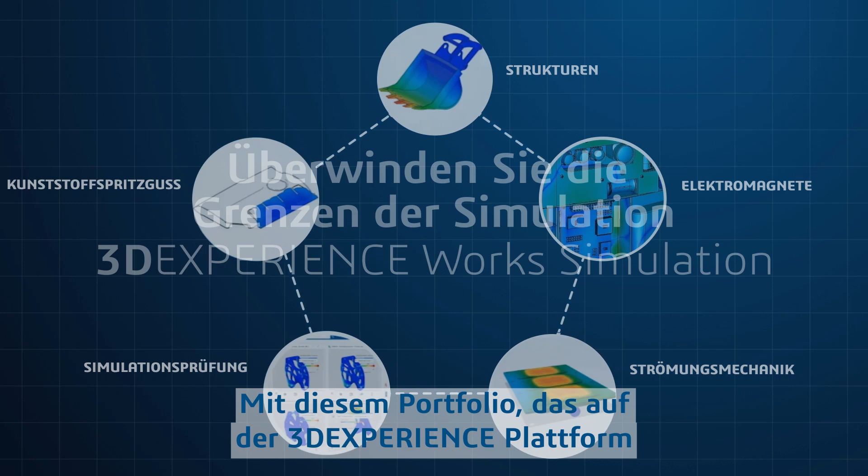The 3DEXPERIENCE Works simulation portfolio provides comprehensive all-physics, all-scale simulation solutions for evaluating how your product will behave in real life. With this portfolio, available on the 3DEXPERIENCE platform on the cloud, you can get the benefits of early virtual testing to assess product performance and quality with confidence.

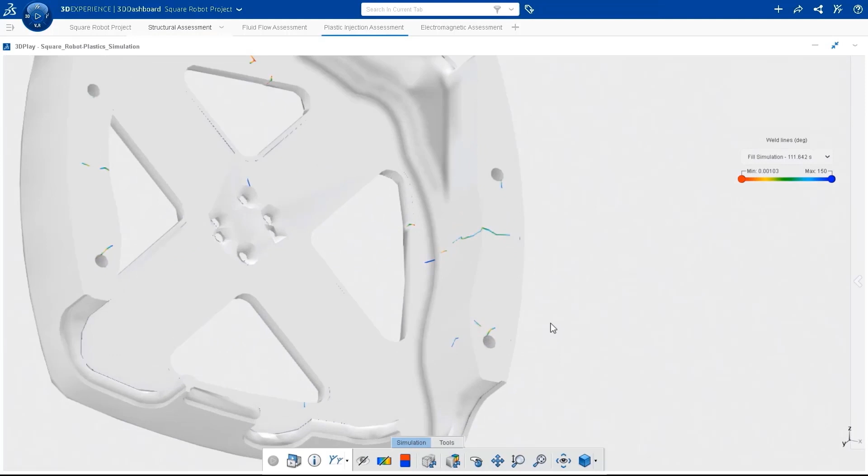The included SIMULIA roles will guide your engineering decisions throughout the design process, all without building expensive prototypes or relying on outsourcing. No matter which industry you're working in or the size of your company, the 3DEXPERIENCE portfolio can support your digital transformation and help you to bring products to market faster and collaborate more effectively. So let's take a look at how this all works.

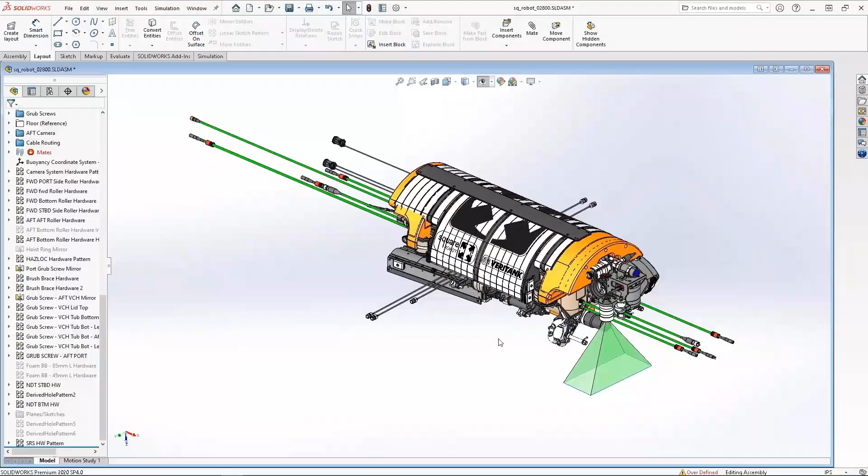Our design is coming from Square Robot, an innovative company building systems for submerged oil and gas inspections. Such a system is designed for tough jobs in harsh environments. It has to be safe and reliable. Starting from SOLIDWORKS, you can connect to the 3DEXPERIENCE platform using a unique and integrated workflow that enables you to easily save, manage, and share your design and simulation data in a secure cloud-based environment. Once the SOLIDWORKS data are saved to the 3DEXPERIENCE platform, the beauty is that data can be seamlessly consumed by any application.

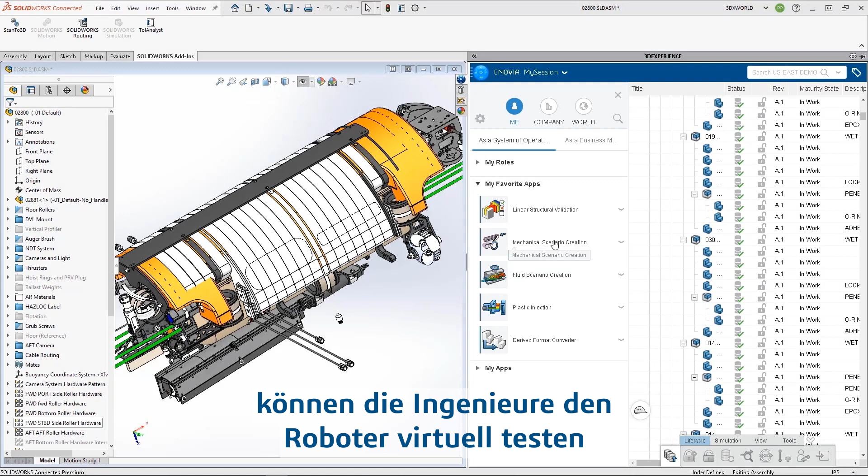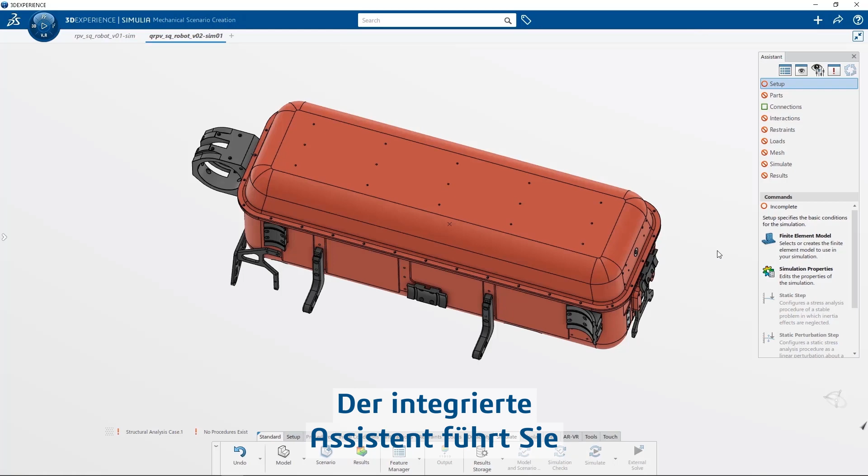While designing it, the engineers can virtually test the robot based on the severe requirements from the working environment for multiple scenarios. First, let's focus on the structural integrity of the subassembly and perform structural analysis to predict its response and strength against static and dynamic loads on it. You can easily select which components to focus on for the subassembly performance assessment. The built-in assistant walks you through the simulation setup to make it quick and easy, enabling all users to smoothly adopt the solution during their design process.

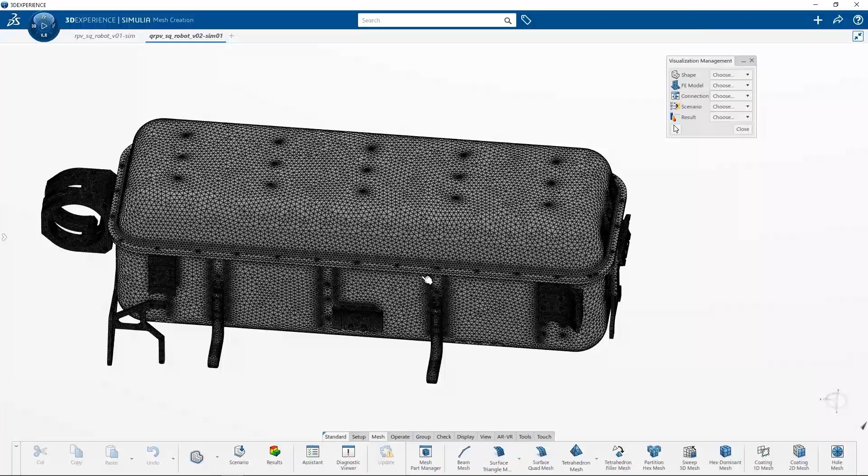Automatic mesh generation speeds up the setup process with precise representation of the geometry. When needed, powerful manual meshing methods and comprehensive quality checks are available when local mesh modifications are desired. To ensure the fidelity of your simulations, the tools for setting up the boundary conditions like fixtures and loads, along with defining connections, fasteners, and contact conditions, are available for different study types.

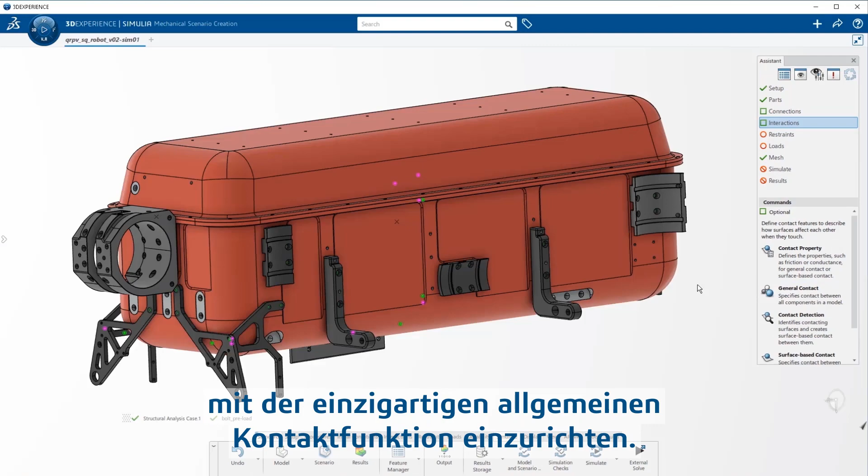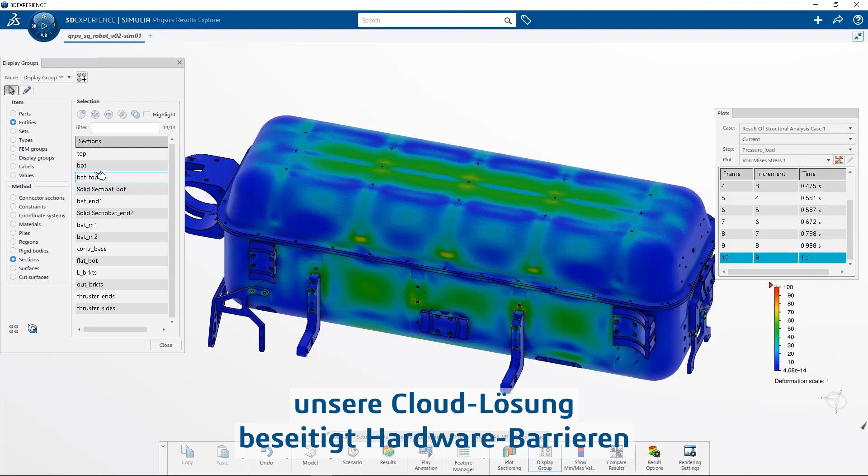In a few clicks, multiple bolts can be replicated from a single bolt setup to boost your productivity. Look how easy it is to set up contacts in a single click with a unique general contact capability. Loads, restraints, and fasteners are easily defined on the geometry itself, ensuring full associativity when the design changes. And when it's time to solve the study, you can choose to run the analysis locally or on the cloud and take advantage of high-performance computing resources. Whatever your IT infrastructure is, our cloud solution removes hardware barriers, enabling all users to benefit from powerful virtual testing.

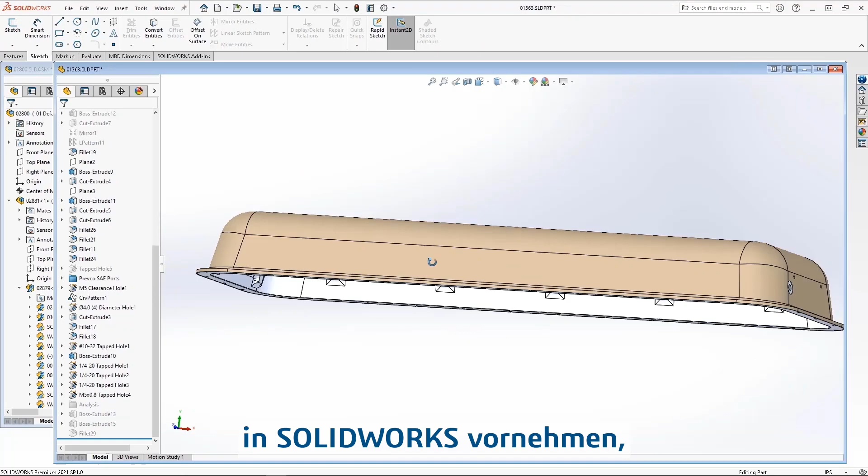Once the simulation is complete, you can start reviewing the design behavior and understanding potential critical areas or overdimensioned areas. The deformation of the vessel will be reduced for stronger integrity. Let's see how stiffeners can help towards this goal. You can easily make a design change in SOLIDWORKS, save it, and simply update the simulation models for an efficient what-if scenario. As simple as that, this is a true simulation-driven design experience. This design change definitely improves the stiffness of the cover design. One more step towards reliable design with 3DEXPERIENCE.

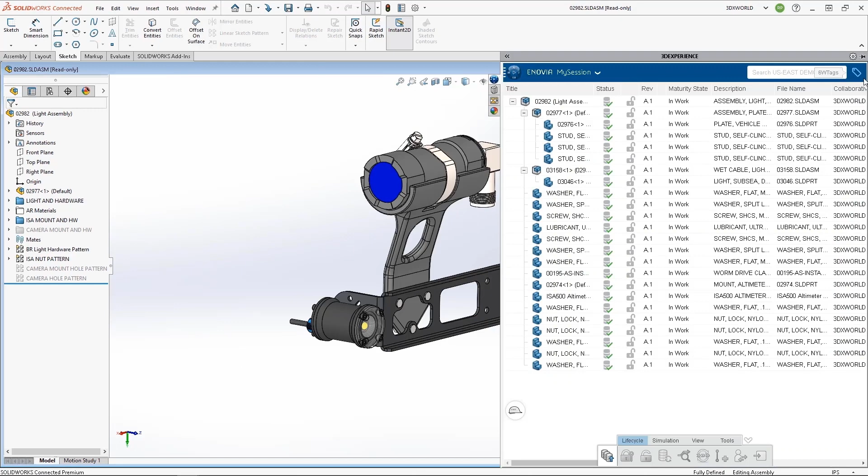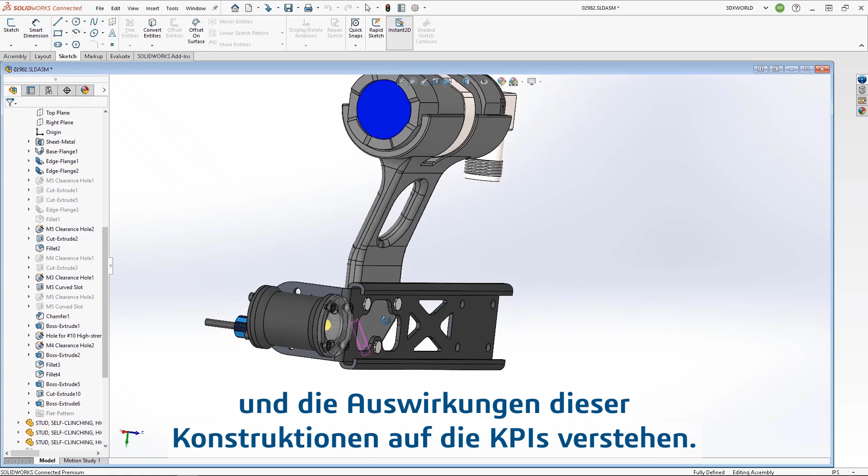What about avoiding vibrations and related deformations? 3DEXPERIENCE Works simulation solution offers a scalable simulation environment for all user profiles, from designers up to advanced engineers, and for all simulation scenarios. With the same intuitive user interface, designers can assess the natural frequencies of the light assembly. From these baseline results, designers can easily modify the design and understand the impact of these designs on the KPIs. Improving product performance has never been easier.

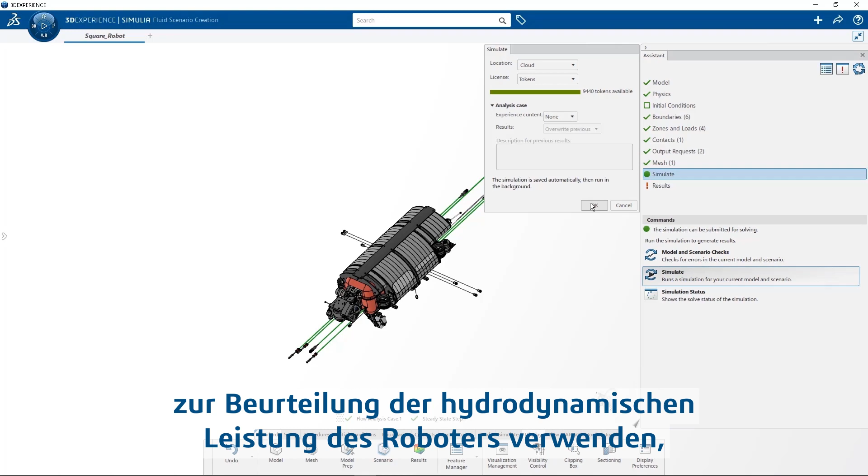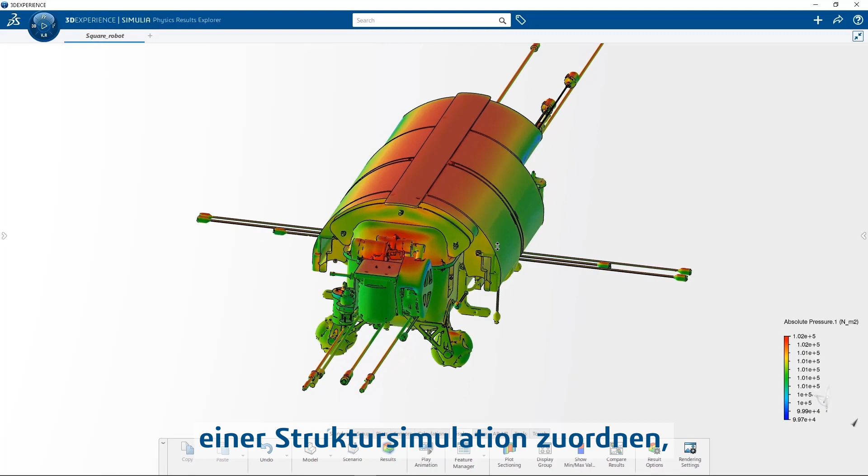The beauty of our solution is that the same user experience is offered in a unified multidisciplinary environment, irrespective of physics domains being explored. Another item of interest in the robot is the propeller assembly. You can easily set up and perform a fluid flow simulation with the same guided assistant to assess hydrodynamic performance of the robot submerged inside the petroleum storage tank. While external fluid flow studies around the robot will provide forces and moments acting on the surface, one can also gain non-intuitive insights into flow fields around the assembly through high-quality visualizations. You can take this a step further by mapping pressure data obtained from flow analysis onto a structural simulation to identify stability of the design to withstand fluid forces inside storage tanks.

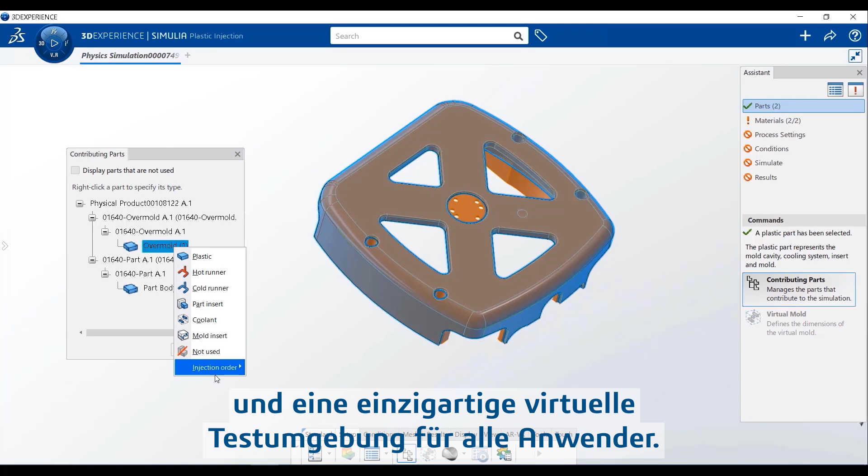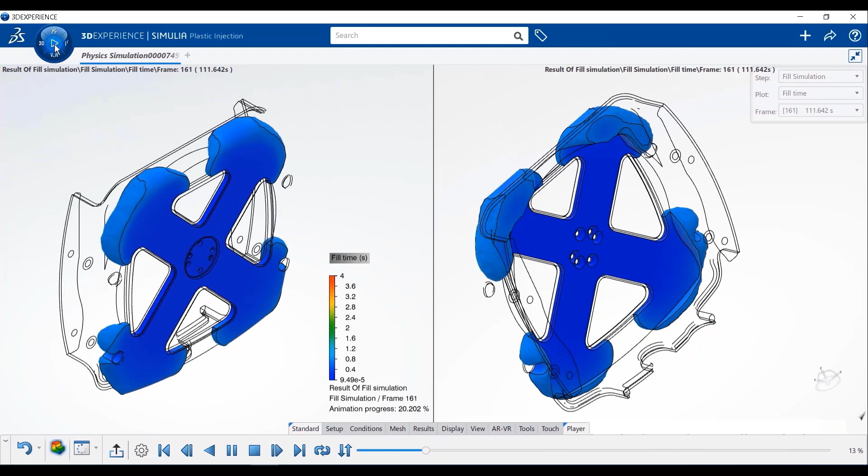3DEXPERIENCE Works simulation portfolio also offers intuitive and designer-centric plastic injection simulation capabilities. Again, the same guided assistant and workflow with SOLIDWORKS for full associativity offer digital continuity and a unique virtual testing environment for all users. Assign materials from a library of more than 4,000 plastic grades, specify your manufacturing process, and easily assign injection location points to get the assessment of the plastic injection faster than ever. During the design process, you can evaluate and improve plastic part and mold tooling designs by simulating the filling and packing process and the mold's cooling system. Collaborate with your peers and customers, leveraging simulation results as technical insights for your meetings using the web dashboards.

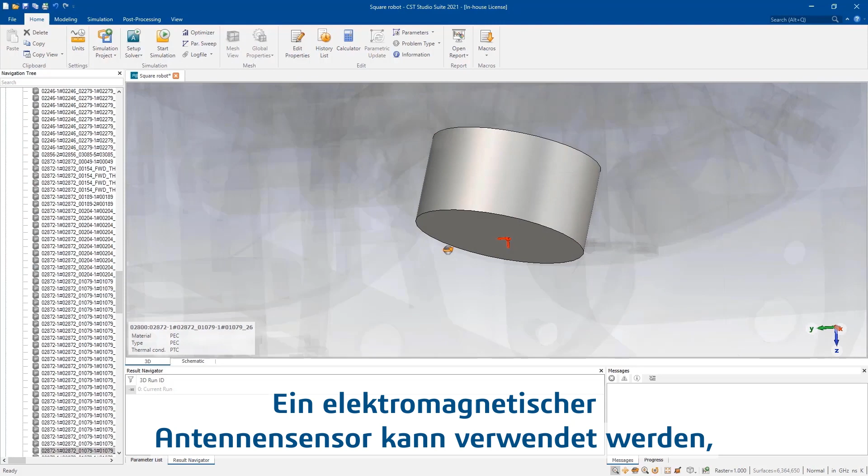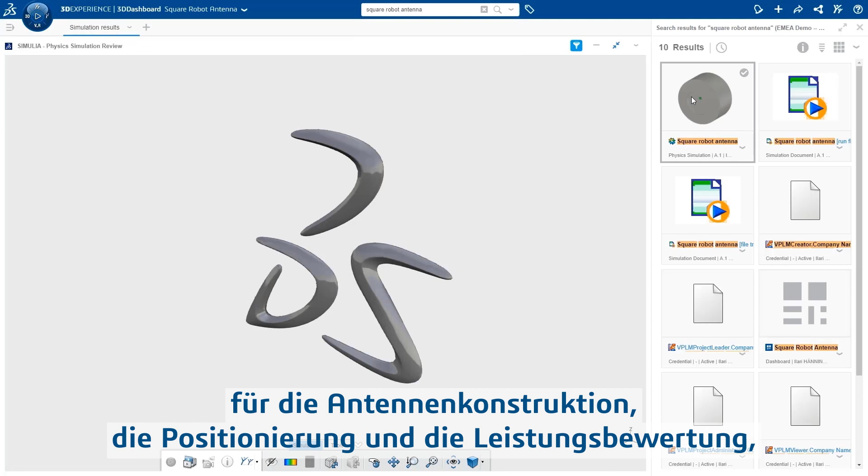But the robot is nothing without its sensors. After all, the main function of the robot is to inspect the integrity of oil and gas tanks, and it needs a multitude of sensors for that purpose. An electromagnetic antenna sensor can be used to detect small imperfections or irregularities in the tank that are difficult to detect with camera or ultrasound sensors. However, the harsh operating environment of the robot also poses challenges for the antenna design. 3DEXPERIENCE Works simulation portfolio also offers a solution for electromagnetic simulation for the antenna design, positioning, and performance evaluation once installed on the robot.

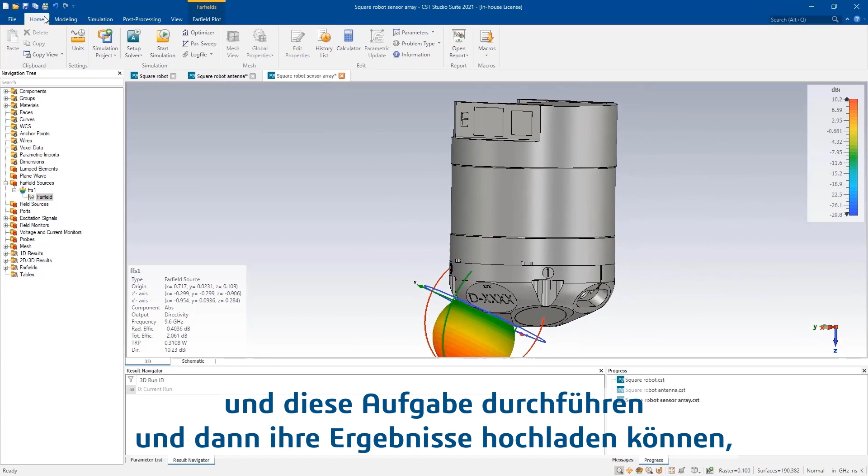You can design the standalone antenna and optimize its performance to the desired functional criteria, taking into account the operating environment and the various electromagnetic material properties of the oil or gas in which it needs to function. Or you can collaborate with colleagues who are antenna design experts and can perform that task and then upload the results for your review to the 3DEXPERIENCE platform. Once the antenna design is ready, it can easily be integrated into the sensor array of the robot, and its installed performance can be verified. Thanks to the guided workflows and intuitive user interface, setting up the meshing and simulation is available to all users, from designers to simulation experts.

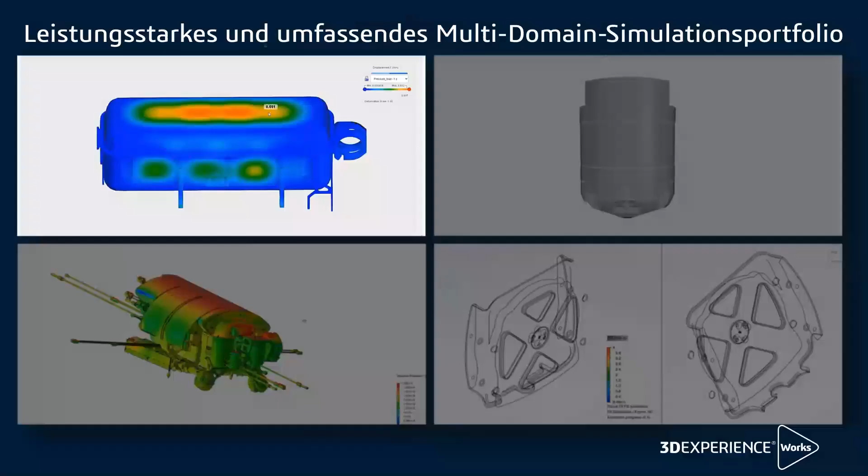The simulation portfolio offers a scalable, connected, and powerful solution for all designers and engineers, so they can assess product performance easier and faster than ever. With structural, fluid flow, plastic injection, and electromagnetic simulations, you are empowered to get the right technical insights you need for a new and innovative product development process. With Dassault Systèmes solutions, you can streamline your design and simulation process today to produce the products of tomorrow.